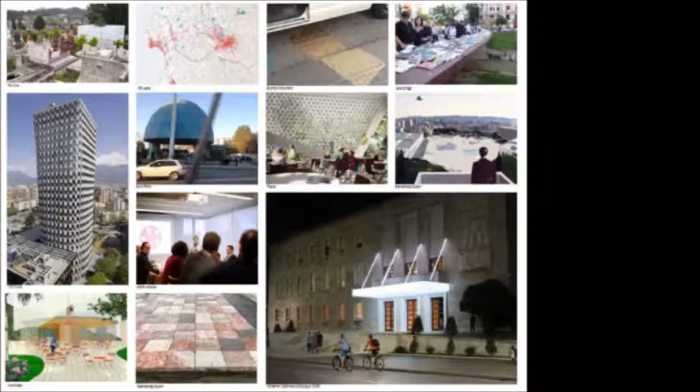The projects of the timeline are very diverse. It almost feels like a sample of all the moments in life. We have made a grave, a gas station, a bridge, this tower, and we are also currently producing the central square. So in that sense, Tirana has proven to become a very fertile context for us.

And in retrospect, we think that is not a coincidence, because we were very much looking for a place that was open, ready to think of new opportunities. To be honest, that is sometimes very difficult in Belgium, in Flanders, or in the center of Europe. As a young architect, you have a lot of desires to do things, and you are often confronted with a situation where people block you more than use you.

I think a big problem of contemporary society in Europe is there's a lot of resistance to change. What we found in Albania was a huge openness to change, to invent, to try out, to at least do something. And I think this page is already proof of that quality.

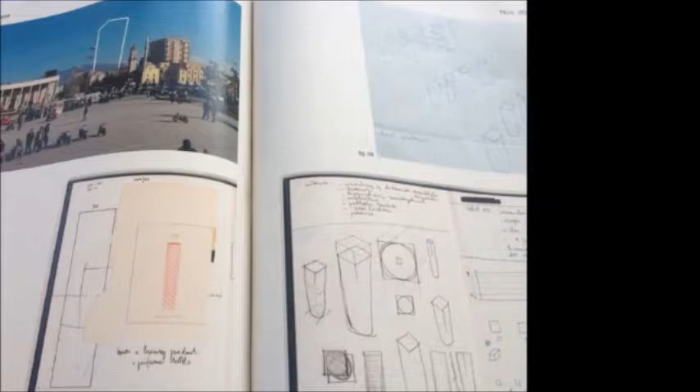Our proposal was to capture this light with a tower that would be a shape that goes from a round footprint to a square top, where you see that this produces a building which answers the somehow impossibly fine silhouette which was drawn in the master plan, and somehow did a pragmatic proposal to that desire, shifting in a way the elegance to how light and shadow falls onto that shape.

A second reason I think why we won the competition was that we proposed basically a quarter of a cupola on top of one of the monuments of the city. So basically finding a relation to something that was there and that was largely overlooked - we somehow cared for it.

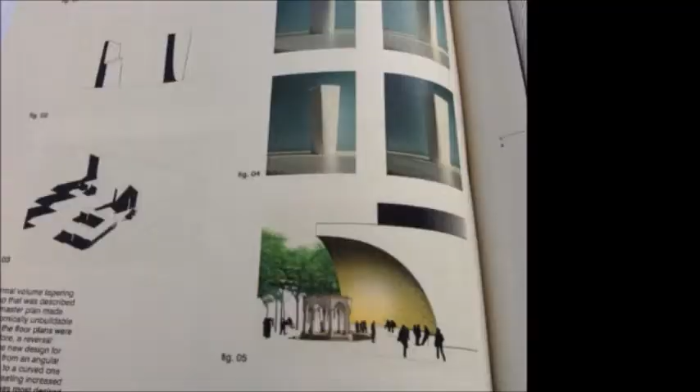And the third reason was that we were able to present the project orally. So we didn't have to show panels only, but we could also share what we thought, what we felt, how we would deal with those observations, and how we thought the building could become intelligent. But we were also able to say that during the competition we were not able to reach that intelligence yet. So we explained how we thought the project should become a kind of laboratory, a work in progress, something that would be shared with the people around the table.

And that, I think, is a very unique condition that we do not often find in European tendering - that you are able to express intentions, you are able to express doubts, and you are able to share somehow how you would set up a dialogue, rather than just convince someone of how smart you are and how well your result is. So I think to be able to relieve that fake impression of knowing it all was actually an opportunity that we could seize, and that made us, I think, win.

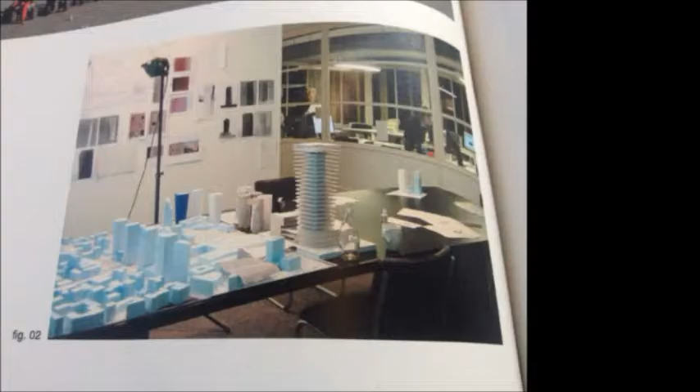Of course, we had tested some possibilities. Here is the possibility of a mineral facade, which is a condition to capture that light, this condition of light and shadow. The day after we won, we were sitting together with the developer, and he was saying that he accepted the choice of the jury, but he didn't accept this solution. So very early on, it became clear that it would become, in a way, very difficult. We were also confronted for the first time with his very physical and very emotional way of expressing himself.

So we embarked on this journey. Here you see 2005, on how to take these intentions, to try and give solutions to these intentions, but also reshape these solutions according to the local opportunities and the local capacities that we would find.

Being there as a young international office by default put us very quickly into a situation where we were meeting a lot of other people and where we could set up a series of test projects.

This was one of them: the question to build a gas station at the entrance to the city center. We proposed quite an iconic gas station with a cupola that we wanted to make in brick, as a way to test the combination of a cheap material with readily available labor in the country.

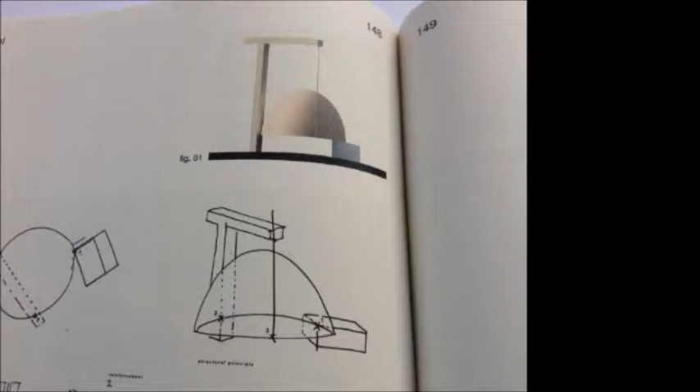So the idea was to use this gas station to become a prime example of what we wanted to do with the tower.

This encounter was extremely enriching, because he, for instance, is someone who had studied but took up the endeavor of opening a gas station because that was the most lucrative. We also met, for instance, a gynecologist who made pizza, because in that country that kind of business produces much more value.

So we were confronted, one-to-one, with a lot of absurdities, and these absurdities were actually very interesting to start to understand how that society works and how things are interpreted and perceived.

The goal of producing that brick dome proved impossible. We tried to set up certain alliances, for instance with a technical school from Belgium that had this technique of making a dome, but still he didn't want to try it.

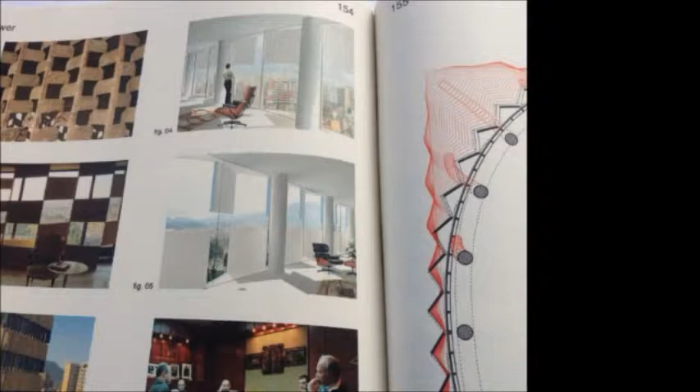And this also made it possible for the glass facade to just run from floor to ceiling in a very simple way, making the best thing possible.

So this produces this type of plan with a core which is also earthquake proof, and then with a series of simple floors, and with columns which incline in subtle ways. So a building that requires a certain sense of precision but doesn't depend solely on that precision.

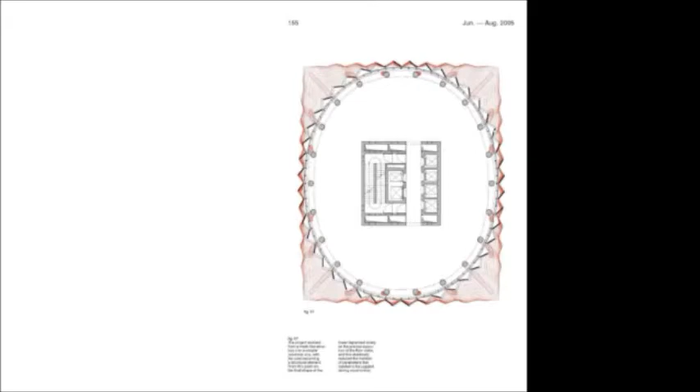And the panel basically produces very beautiful proximity, and also has basically the size of a body. So also the windows that are left out are somehow very human scale, very man-sized or woman-sized, which gives suddenly not only this very abstract skin, very abstract building, but also a very personal experience when you are in the building.

And so, funnily enough, with the building having to become so dumb, and with the program also changing so many times, because the developer had a lot of difficulties setting up the right program. So it started out as a mixed-use building. It gradually became, at a certain point, a headquarters for a bank. Then there were discussions with an international hotel. They didn't work.

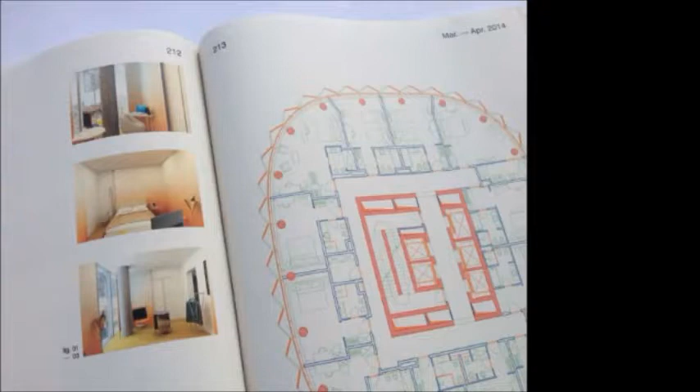And this was also very much the case. So here you see, for instance, a plan drawn for a hotel room, trying to fit it in. But also plans that were produced - this one, for instance, a proposal that we did to him of not making a hotel, but making more very compact apartments for international people to come and live there.

Because this is the only building in Tirana, maybe by now one of the few, that has fire safety according to regulations, which has a double fire escape stair, for instance, which a lot of other buildings don't have. So suddenly we thought you could think of different types of use that go beyond the hotel.

And the funny thing is that all of these changes, for him, it's very imaginable. So he doesn't have a fixed program, he just has a building, he builds at capacity. And still today, even if the hotel is in use, some of the floors are left empty, and he will see what he will do with them. So it's a very organic way of dealing with a building of that size.

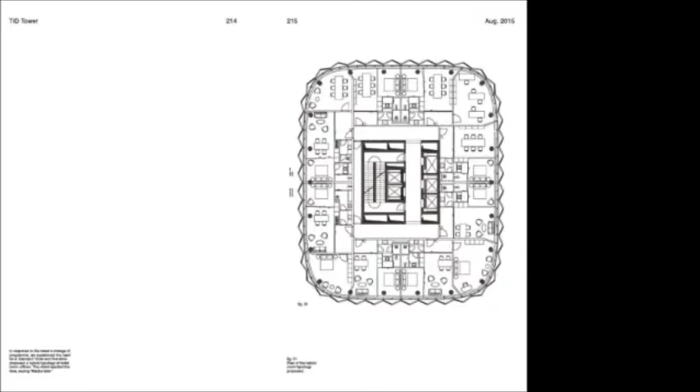So this plan is drawn 10 years after the first plans.

The building was also, let's say, manipulated quite brutally during the construction process. So, for instance, when he decided to make his own hotel, he had to have a congress venue, which he decided to make underground. He started to demolish the floor of the street that was in between the two buildings of the complex - that's where the floor was connecting.

And when he was confronted with that situation, he decided indeed that he would not demolish the structure, which was a heavy discussion with his engineer. We, at the same time, came up with a proposal to put that venue on top of the 3-story building, which is now turned into a 4-story building.

And we proposed it as a continuation of the facade with a glazed pavilion in the middle of that, which produces, in a way, a very beautiful outdoor patio.

Yeah, it sounds maybe very like a caricature, which maybe it is also a bit, but still I think it was very interesting to think of building systems and think of reactions that would take his question and not say no, because it was not the plan, but to say yes, but in such and such a way. And so to improvise basically with these changing conditions and to invent, to be, let's say, radically flexible, you could say.

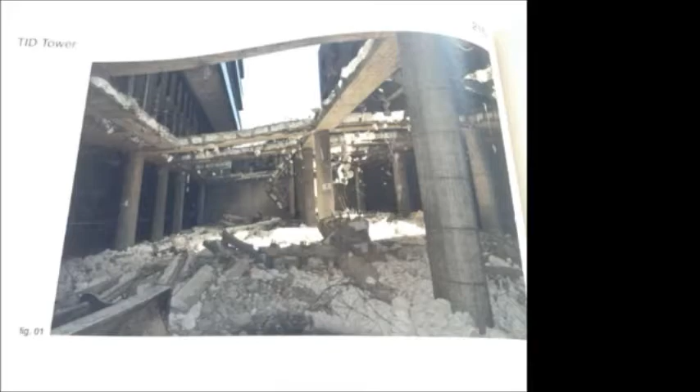So this is a zoom of that demolition, and this is a zoom of the Congress space proposal, which you see here in plan.

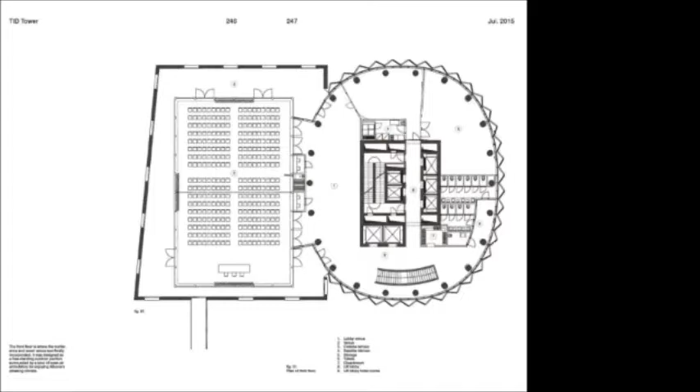And interestingly enough, I think a certain formal logic about the building, like this shape that goes from a super ellipse to a rectangle, were in that process anchor points giving rules to the building. Even if they are very artificial, they would always allow us to reason within a certain system.

And so this adaptive reuse produced a building which in 2015 was both figuring in the In-Flight magazine, while at the same time was being transformed and demolished, which is in a way something that happens with buildings anyhow. For instance, this building is an example — today it is being transformed and still we're using it. But for us it was a very interesting exercise to be confronted with it.

So to think of buildings basically already from the perspective of their inertia to change, but also their capacity for change, and how you would combine these both things — this resistance and this openness — in an interesting and flexible way.

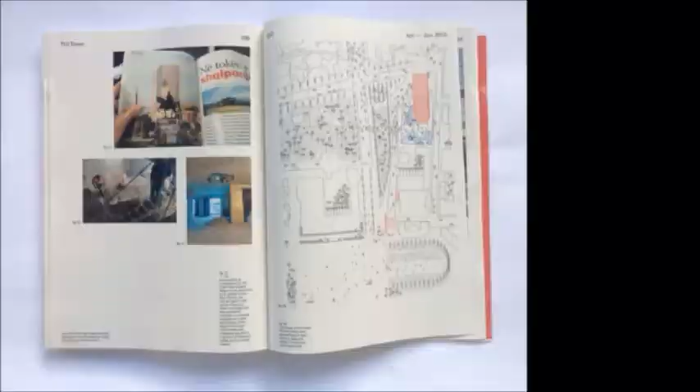So that's one thing that we learned by doing that building. But another thing that we learned very much in Albania was to activate the value hidden in the process of architecture. So what I explained about the building being open to change, I think this is something we all share and try to look for and maybe value. Another thing I think we all do, and maybe if you talk about good architecture in general, is to activate the value hidden in the process.

But we actually think there's very little discourse about it, that people don't talk about it that much, and that clients and cities are much more confronted with architects trying to sell the genius of their solution, but not very much the value they can have during a process. And the moment that you can work together with someone, that's actually a very valuable moment.

And that's, I think, a second thing that we learned very much and that we try to promote as much as possible — to see architecture very much as a process and to try and activate the value that is hidden in that process.

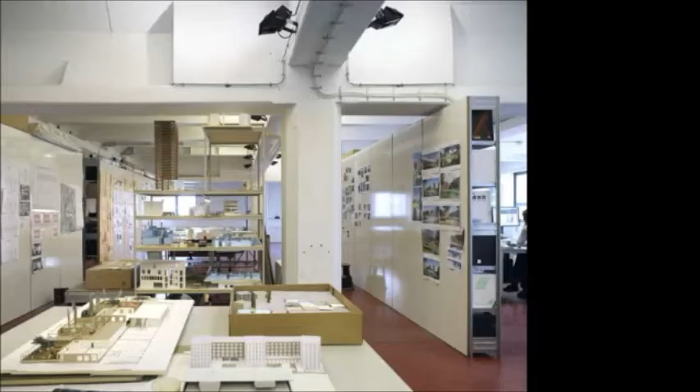So what does this mean in a very practical way? It basically means that you are in a situation where you discuss with people, not around the table agreeing or disagreeing, but really working together with all of the tools that you have as an architect — models, images, plans — and that you are actually sitting in front of people that you want to make something with.

And that's actually a very valuable situation, that you are suddenly able to transform the dialogue, not into an oppositional dialogue, but a way where you find third solutions in discussing. If you have one person saying one thing and another person saying another thing, during the working together you can find other things.

And so that's something that we have throughout the years tried to refocus more and more — we try to do the modeling like an architect does, but try to open up that process of modeling. And also, the fact that a lot of things are digital and extremely fast and easy somehow, means that by reducing it, making it more efficient and more quick, you can increase the time for dialogue and really value the moments of sitting together, working together much more.

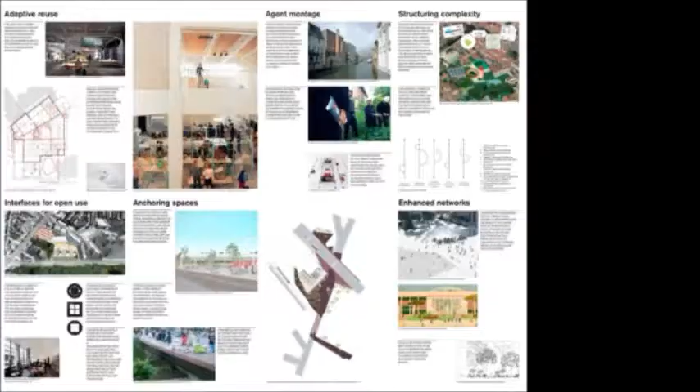In order to make that story accessible and understandable to ourselves and to others, we have started to make small leaflets, which we call conversation booklets, which try to put into words what these different processes are. So if we talk about urban renewal, we talk about a process that is about adaptive reuse, but also about agent montage, about structuring complexity, about interfaces for open use and making anchoring spaces, and also about enhancing networks. So the second and last part of the lecture will be about trying to explain this, so that maybe we can later have an exchange or a discussion about it.

What do we mean with agent montage? Just like in Tirana, we were more and more confronted with the situation that in the existing built environment in European cities, programs are not clear. So you have existing buildings, and writing down a program often doesn't work. So how do you deal with that situation? And also, if you write a program together with other people, how can you come up with a situation that somehow empowers these people to also become creative and to become actors in that process? Not just to hand them something ready-made, but to somehow think along and produce an openness in how the building could be used.

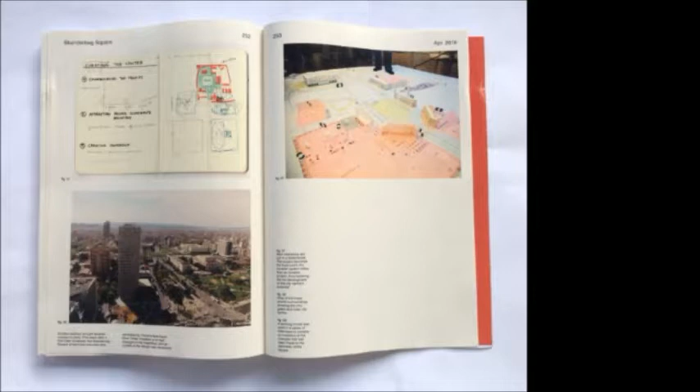It started with a mapping of what had changed. So this is the mayor on his socks on a big model, showing the difference between the situation in 2011 and the situation in 2016.

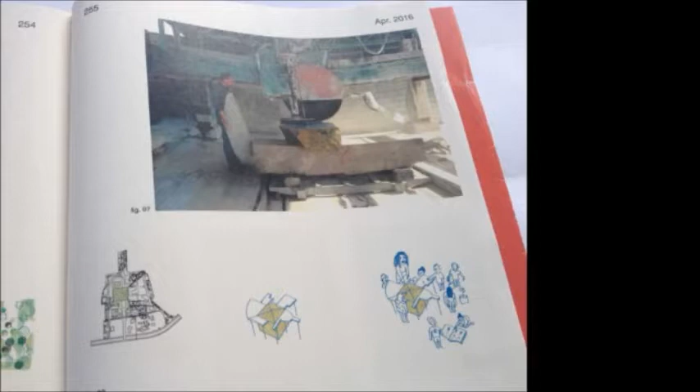But then also, basically, we made a model of our project, which was the project in its most simple form, and then set up a series of situations, dialogue settings around the project, trying to trigger people to invent it in different ways and from different perspectives. So during a period of, I think, 3-4 months, we both had a very intense work with all the technical people again in Tirana, but also a very explicitly open process where we were sharing the fact that the project was to a large extent undefined, maybe to a large extent didn't produce the right choices.

For instance, the project was very mineral and maybe not very green. And so we were somehow collecting and sharing these thoughts, which was in a way a thing that never happened in Tirana before. It produced ideas about reorganizing the ring road around the project, but also very simple and basic ideas like making a book garden where the National Library is, somehow to produce links between the project and its surroundings in a very simple and organic way.

This kind of process of offering the project as a very basic frame, and then allowing a program to be invented from that frame, was also something we tested and experimented with in Belgium, for the Buda Factory, a project for the refurbishment of an existing building that the city had bought, wanting it to have a cultural function.

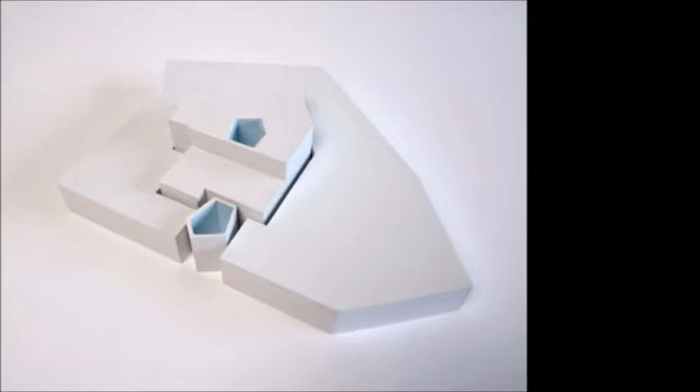They didn't really know what that cultural function would be or what would work. So alongside the definition of the program, we produced a building that would still offer a sense of clarity, even though a lot of the building's definition could not be made, because simply they didn't have a very clear view on what they wanted.

So how did we react to that situation? We made a proposal where the center of the building had an atrium, a clear void, whose shape we found by taking away a few of the beams. Then we repeated that found form as a pavilion in front of the building.

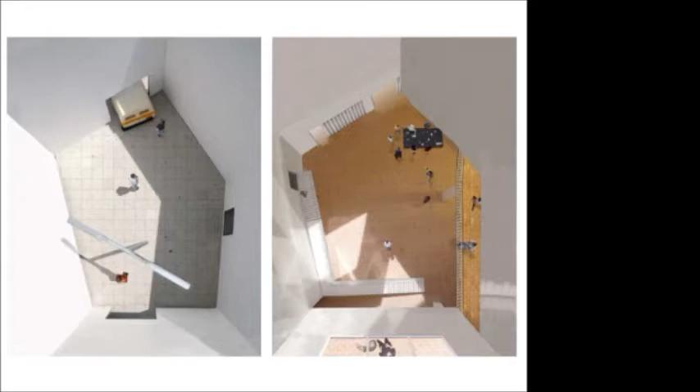These two interventions absorbed most of the budget we had, producing somehow, out of a factory building, a public building through these two spaces: one, an entrance pavilion, and another, a space that organizes the circulation.

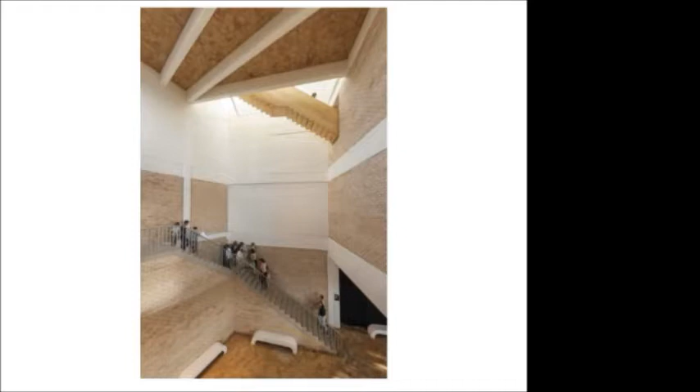We tried to manipulate all of the choices to be as pragmatic as possible, but also to reveal the beauty of the building. So here the floor is existing, the ceiling is existing, but the brick is new, producing a new whole.

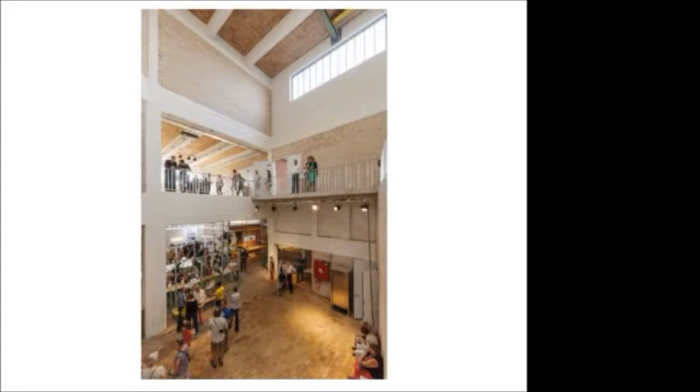Together with the client, we invented a series of actions that allowed them to program the building gradually. One thing that happened is that not all spaces were treated and brought to standard in the same way. Some spaces were left without insulation, some even without heating, with the idea that their occupation of the building would change during the seasons.

They had very little to start with, and we came to the conclusion together that at the entrance there would not be a reception, but an atelier, a kind of fab lab in its most brute form, and that the person running this fab lab would also be the receptionist, managing the whole building. So the program collapsed into one core, and with that one presence they could flexibly swell or inflate the occupation of the building.

This meant the building would have a daily life where only maybe 20% is used. Then when there's an exhibition, the Fab Lab can produce it, and the exhibition can open up a few rooms. This goes to the point where, for some events during weekends, up to 80,000 people passed through the building in one weekend.

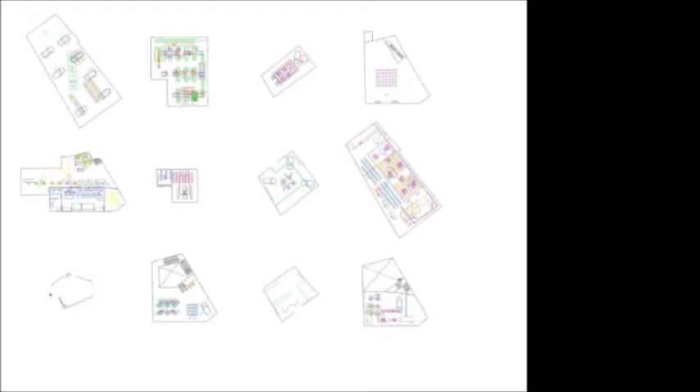So the building, in all its simplicity, allowed them to gradually build the program. Now the Fab Lab has enough users that it can be moved away from the entrance upstairs. The building, together with organizing that process, manages to really grow a program rather than write and roll it out.

So here you see this kind of post-occupancy situation as it was produced. I think that's valuable to think about regarding organic growth: the things that are stable in that building are these two spaces, these two centers, while the things that are extremely flexible are the perimeter, the facade.

For instance, now they are building an elderly home next to it, of which we are not the architects, but the discussion is about sharing that garden and opening up this facade. This is actually the entrance to the parking garage of that building, but it becomes an extension on the upper floors. This space is shared with the creche, the daycare center.

So I think that's a valuable lesson: to organize buildings almost more as urban fabric and less as objects or containers.

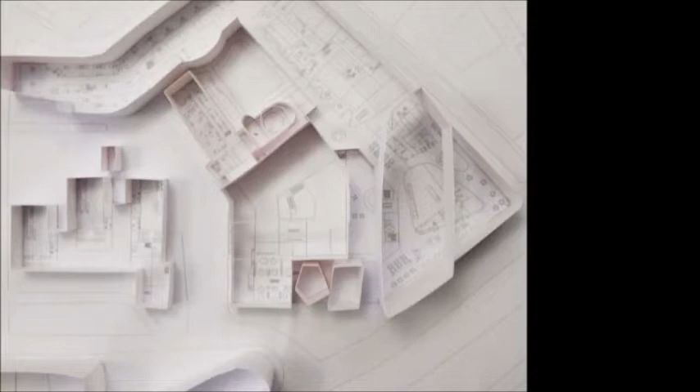Of course, all of this is extremely fuzzy terrain. We step into a lot of situations and conditions where we do not really know how to handle it, where maybe the only power that we have is that we acknowledge that we don't know.

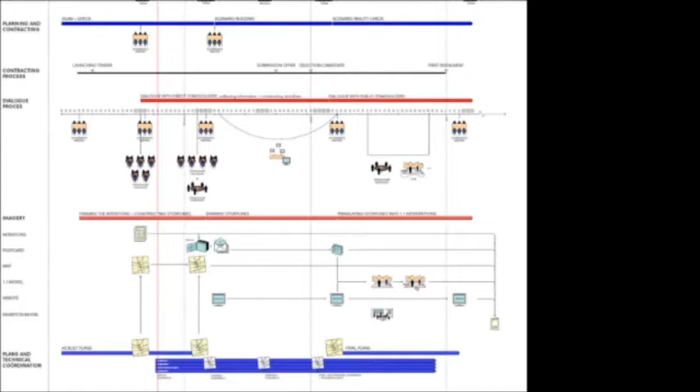But a thing that we have started doing as well is to structure that complexity in its different objectives or different purposes, where both the dialogue process and the more architectural processes are aligned to each other, and we check how the one can feed the other. And this happens with very simple tools.

For instance, for Skanderbeg Square, we have produced a process booklet, which contains a set of references and a set of intentions that come from very different sides, where we also take the responsibility to visualize and somehow capture references that come from other people. And we produce that kind of common imagination that, because of its simplicity, this A5 format, can start to structure in extremely simple, straightforward ways.

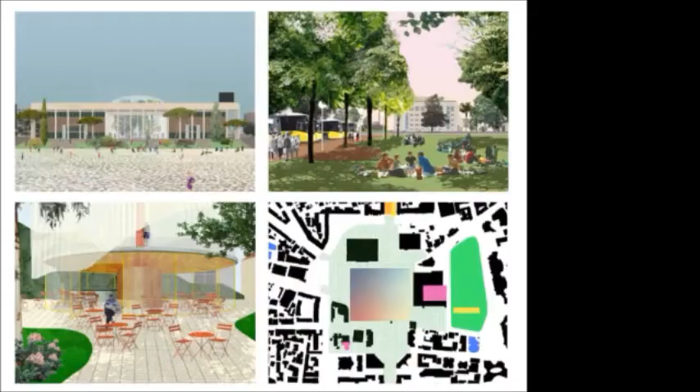And this simplicity is actually also very engaging for people. In Tirana, this has led to the Skanderbeg Square actually activating a lot of even private initiative around it.

In Saint-Nazaire, where we have won a competition in this submarine base, to make in one of the parking garages for submarines a festivity hall, we have used the process of drawing what the context is as a way to define what the strategic impact of this simple program could be. So the City of Saint-Nazaire has since 20 years gradually invested in cultural program in that building, and the program that we were building was adding up to it.

It's a building which is extremely beautiful, but also very difficult. And so they are trying to turn this into a public destination, without a lot of budget, but incrementally doing things.

And so every decision that you take ideally has strategic value and produces a kind of master plan, rather than that you first have a master plan that you then roll out and check. Simple decisions like where do you put the entrance, where is the logistics, produce something that has value beyond the building alone, but also produces public space, puts into attention some values.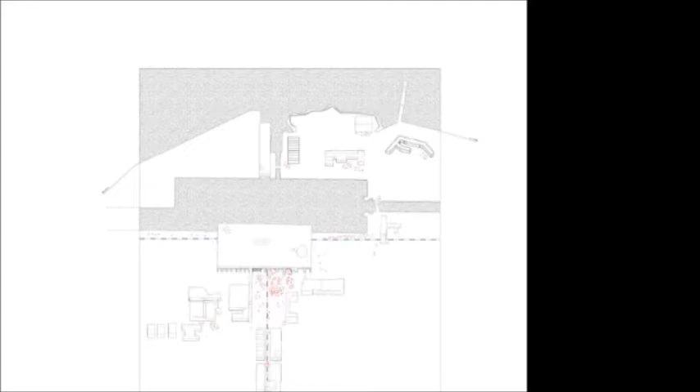We started to make it more precise, to highlight the elements that are important. For instance, this basin turned out to be very important. And so gradually we understood all of the things that were happening that were not documented in some way, but that we could link to and react to.

And so the drawing becomes a drawing of absorbing information, but also giving it back, allowing it to be put in the middle of the table, and to immediately pick up on a discussion, seeing that complexity represented.

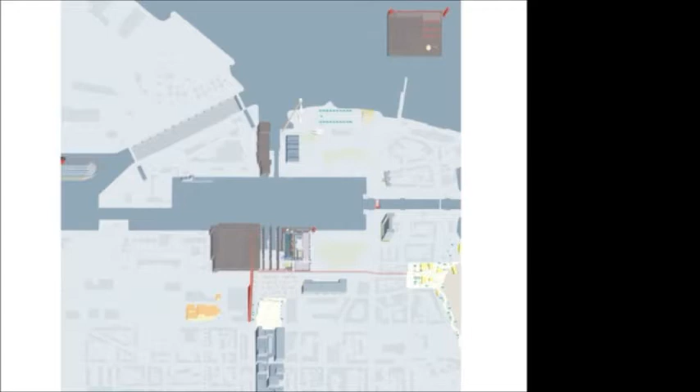And so here you see how some of the choices were made - I will not go into the detail of it, but I think you get the idea. Being able to zoom in also suddenly makes some choices, like where do you put the entrance, extremely valuable. So it's not treated as a minor question, but it's every time checked in its strategic impact.

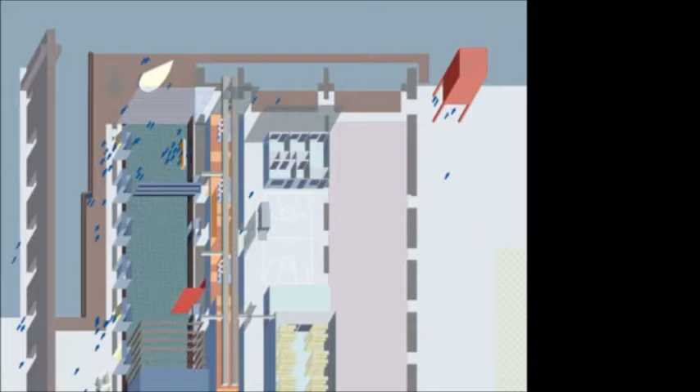And that's how we came up with the proposal of a mobile ticketing office, which could both activate the building but also the public space. Something that was accepted at that point, but now that we are constructing the building, it is again being questioned.

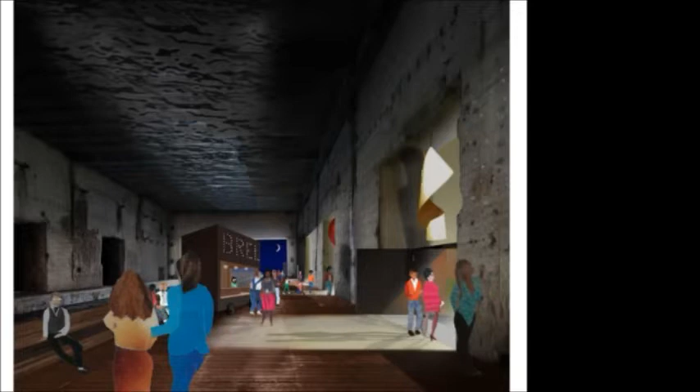This kind of scenario thinking, thinking of buildings as infrastructure and program as scenarios, is something you can really open up. So we make very simple models, and what happens is a bit like when you play as a child, you have this prop to allow yourself to imagine. This is a capacity that, if you offer the right tools, almost any client can do, but simply doesn't get the tools to do that.

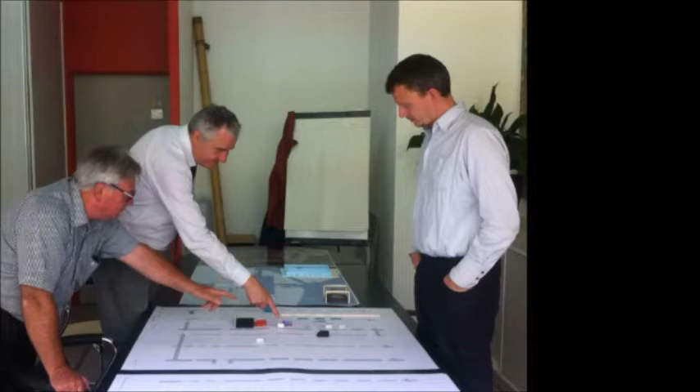And actually this type of game, or this kind of very basic, simple model, is a really interesting tool to activate a client and put them not only in a critical mode, but also in a productive mode, where you suddenly start to get a project thought from different perspectives, but with the same formats and the same tools.

I think it has become clear from the projects I've shown that more and more we shift away from looking at architecture as an object, and shift attention to what kind of spaces anchor a project. We don't take the boundary of a project for granted, but look for things that can structure buildings. So anchoring spaces in that approach is very important.

One example in the TID building is this quarter of a dome, which surprisingly, even by the private developer, was never questioned. He never proposed to make an entrance in that facade, although it's somehow the best facade, you could say. So there is an interest in finding the things that are acknowledged and recognized by everyone.

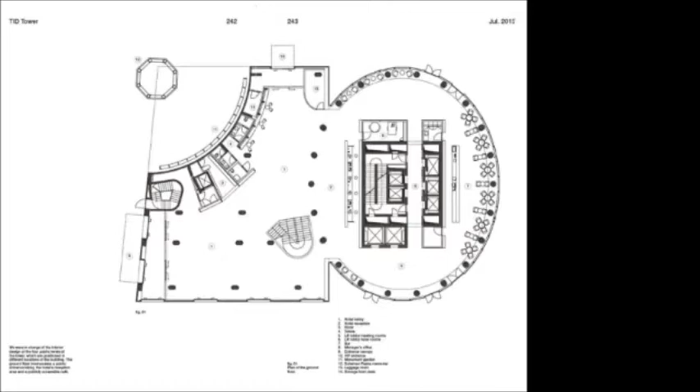Somehow the shape of the building, of the tower, and the shape of that dome were the anchor points of that building, and the large part of the space in between changed and was manipulated a lot. You can also see the lack of order in this plan as the result of that kind of negotiation. So structuring spaces that are negotiable and spaces that are unnegotiable is a very important aspect in opening up the discussion.

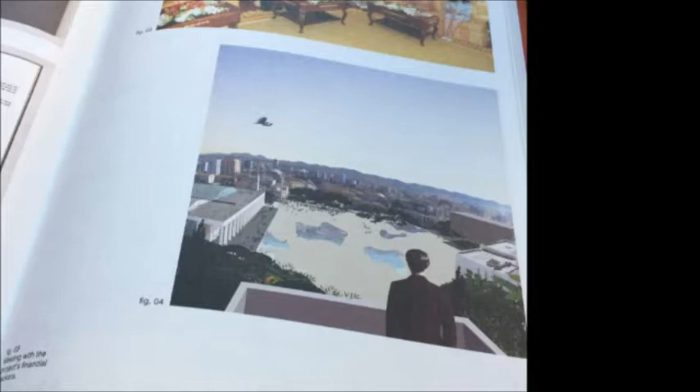Jumping back to the Skanderbeg Square, with this abundance of space, we made this distinction by proposing the project as a very clear square, an actual square, with a series of gardens around it. So the square is somehow the collective decision, the decision that we are the guarantee of. The gardens become more of a thing that can evolve, and within a very simple framework, can offer a lot of diversity and difference.

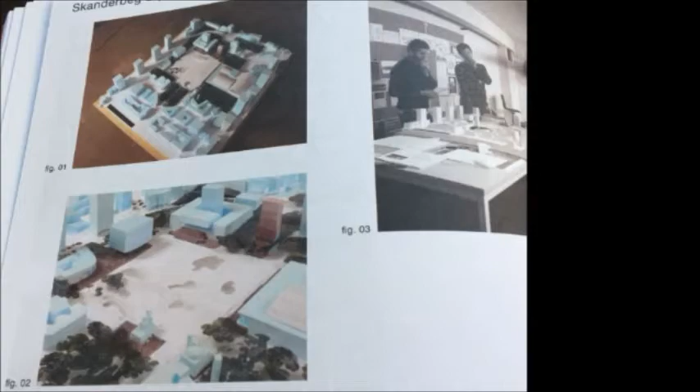So here you see the view of the square seen from the gardens. The definition of that anchor space of the square is actually very simple: it is a very flat pyramid. It slopes up 4%, meaning that if you stand in the middle, you are about 2.7 meters higher than at the edge. So suddenly the shape becomes very dynamic, even though it's just a square.

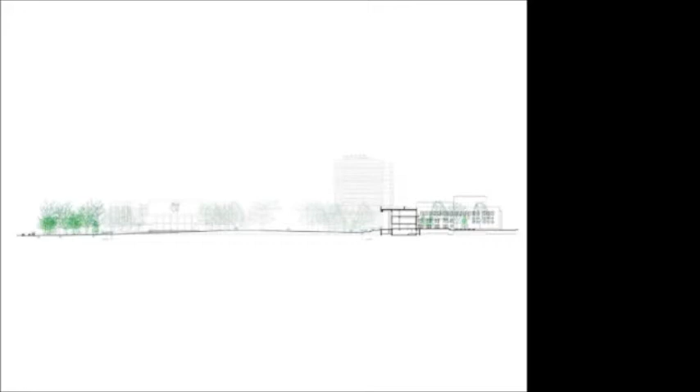If you stand in the middle of that square, you are suddenly on top, in the center, and it's a really specific space. Something it does is that the middle of the square ends up at equal height as the monumental stairs of the building surrounding it, so that without touching the stairs, we completely change their impact.

Something it also does is that we proposed a series of water points on the square, with water flowing, not fountains but more water that flows in four directions, allowing a kind of dry path on the diagonals. This water produces, on that very rigid monumental square, situations of randomness and frivolity, you could say.

Today the square is being executed, and we found a way to do it informed both by the fact that we didn't want this square to be just one thing, and also by the fact that we had to produce this in a very limited amount of time, so we had to source a lot of materials at once.

This made us produce a link to one of the things we found during the process of developing the tower, which is the huge variety of resources in Albania, a lot of different stones. This led us to propose that the square become almost like a national mosaic, made of very different types of natural stone, mixed and matched to produce different color fields, so that walking on the square gives a completely different scale.

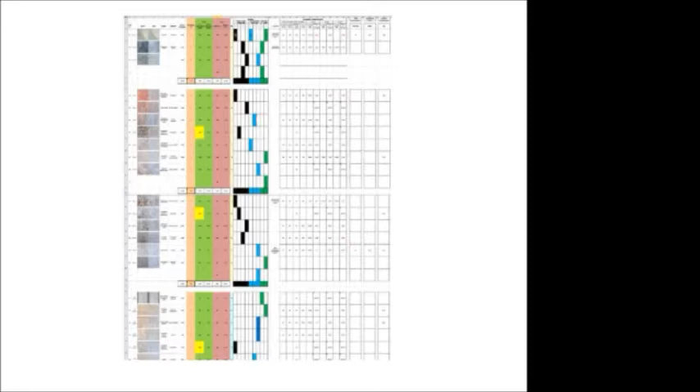And so this has also become part of the Skanderbeg Square, to source these stones, managing their availability together with the design we produced, basically producing a square which, if you look at it from far, is sawn in a rough way so that it actually looks rather white, because of the dust as well. But then once you put water on it with these fountains, you temporarily polish the surface.

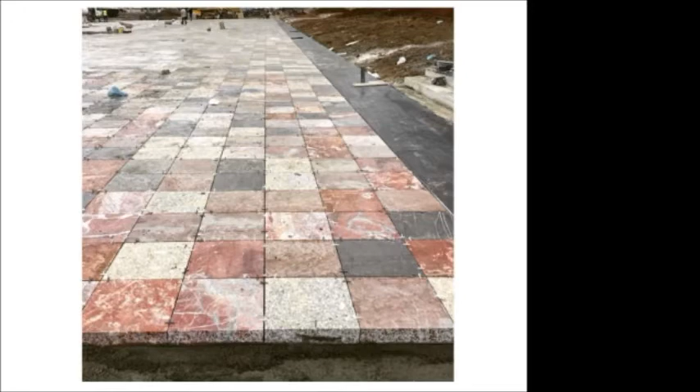And the roughness becomes smooth and transparent, producing an effect like this, where you almost, with the water, reveal a sudden richness and complexity of the veins of the stones. So it produces a square where you feel the module but also see the field.

And this field, indeed—this is a construction site situation. There's also a bit of cement on it now, but basically in its dry state it would be very white, but in its wet state it would reveal all of these differences. And differences which also produce suddenly a very different way of perceiving it.

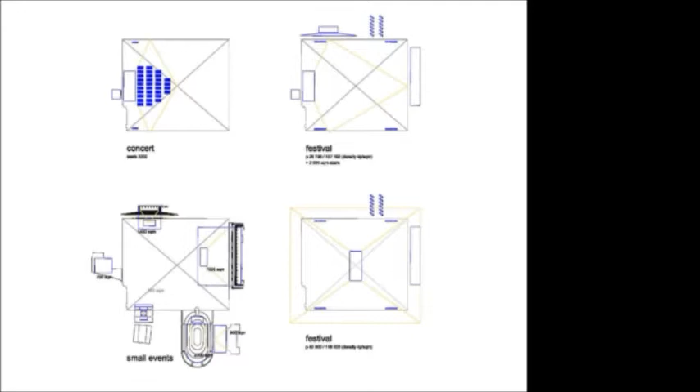So this is a refurbishment of a house in Flanders, in which we have proposed the extension of the room to become like an undefined, overscaled space—a space without a program, a space that feels both inside and outside.

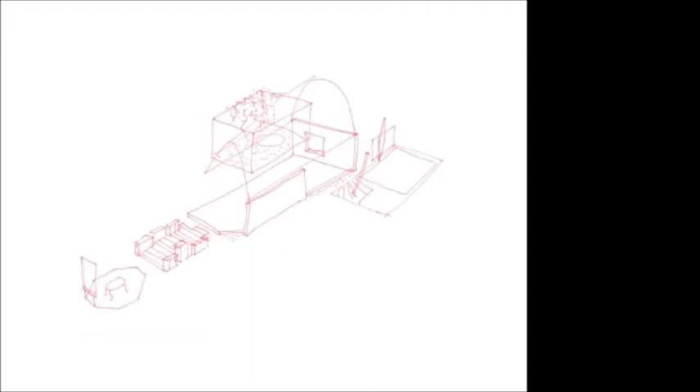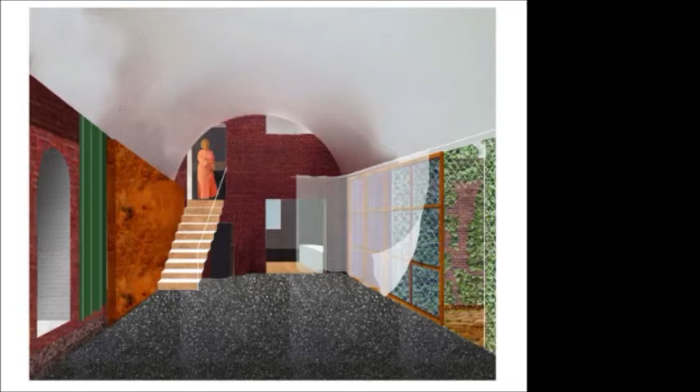And a space also defined just by a floor and a roof. And a space that, in a house, not only tries to think about the functions like cooking or living, but also to think about the moments in life which are really valuable, like having parties or inviting a lot of people, or being alone in a certain sense of emptiness.

And I'm sorry—as you can probably tell, I have a bit of a cold. I also noticed that I'm rather slow today, so I don't know if I should speed up, or if it's okay. Okay.

And so this is a view of that house, both a view on the central space and one of the annex spaces next to it.

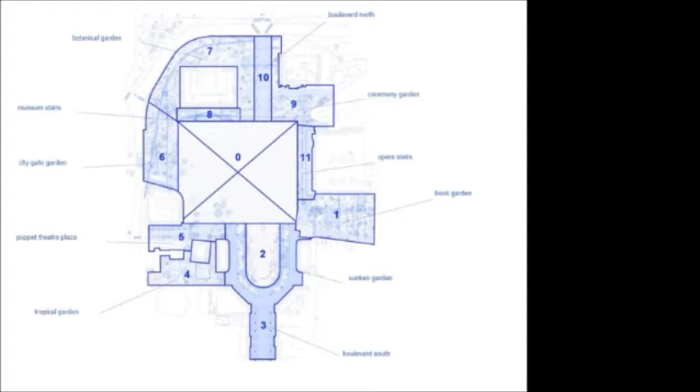This idea of the anchor space is complemented with a focus on what we try to call interfaces for open use. And the square is an example of that. So you have the zero space, which is the anchor space, but then a series of gardens around it, which are designed to somehow become a very thick border and to become a space where a lot of small encounters, small exchanges can happen.

So, for instance, redesigning the stairs that lead to the National Museum to become both an entrance to the National Museum, but also integrated in a series of paths which circle around the square and different ways of sitting.

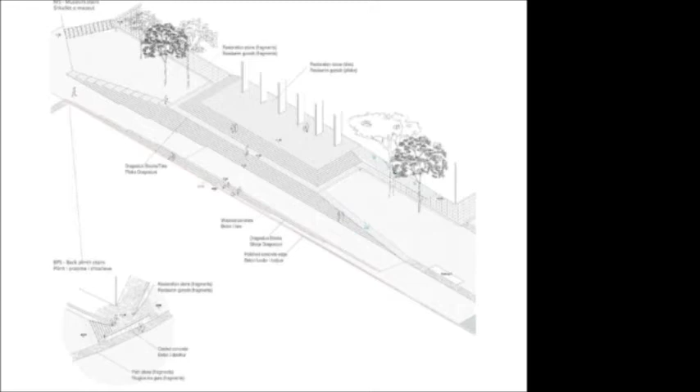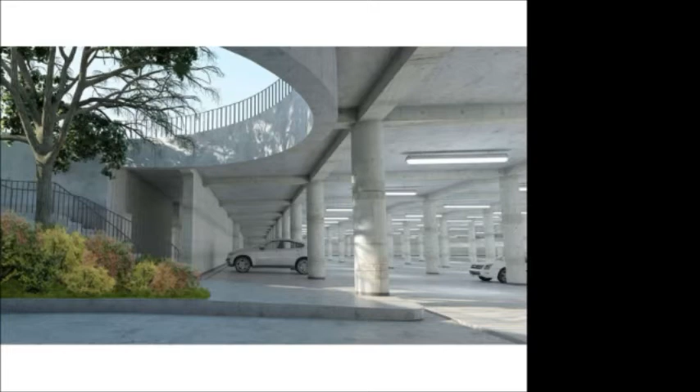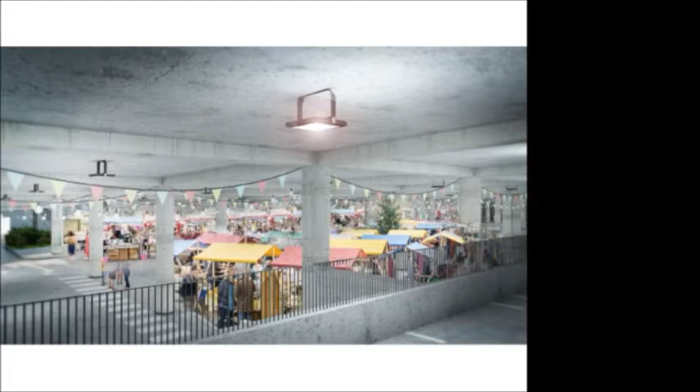And the same goes for the parking which is under the square, which is a program that was added recently. And this entrance is like one of the gardens sinking down, but also then producing a parking which is too high to just park cars, but which then can allow a certain margin for other things to be organized.

And especially in a city like Tirana—but I think this is also basically the quality of any European city—that is different scaling, and this inadaptation, this unadapted city, if you could call it, that's actually a lot of the value. There's a lot of margin, there's a lot of leeway to start to invent and imagine other things to happen.

This is one of the really sustainable qualities of European cities specifically, and this is also what produces this kind of soft proximities. So this is a view from the lobby of the 5-star hotel at this passage space towards the office building that houses a call center.

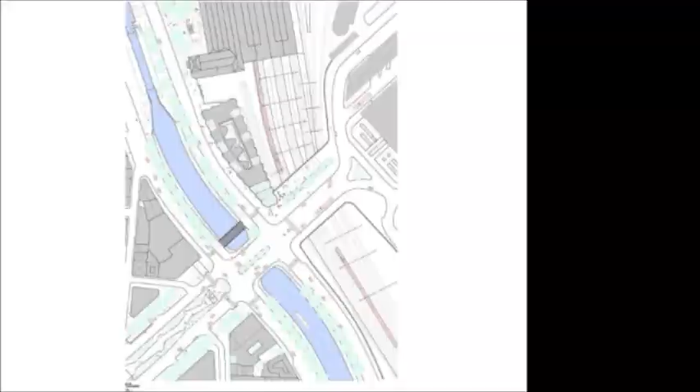It's also, so the question here is how to produce that. Not with buildings, but with green. I will skip this part just to not to—we can maybe come back to it later.

So if I jump to this idea of how one action can become part of a network that you produce, I would like to explain it with Skanderbeg Gardens, which, as I said before, is maybe the most fuzzy part of the project, but which I think will become somehow the future image of it.

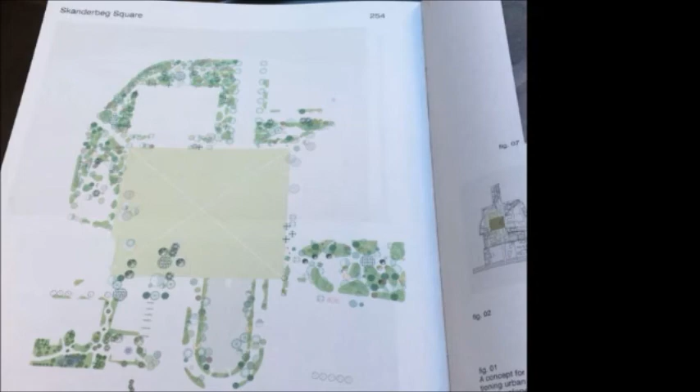And also the future quality, a quality which could make of Tirana a very inviting Mediterranean city. So what we started to do with these gardens is to discuss their components very specifically with the biologist, so that we can start to imagine it as both a representation but also an embodiment of the qualities of that Mediterranean environment.

So here you see again the openness of the space, and here the kind of space which is basically a grass field with trees on top of it. What we would like to produce is more the idea of a kind of urban jungle, a place where you could get lost in.

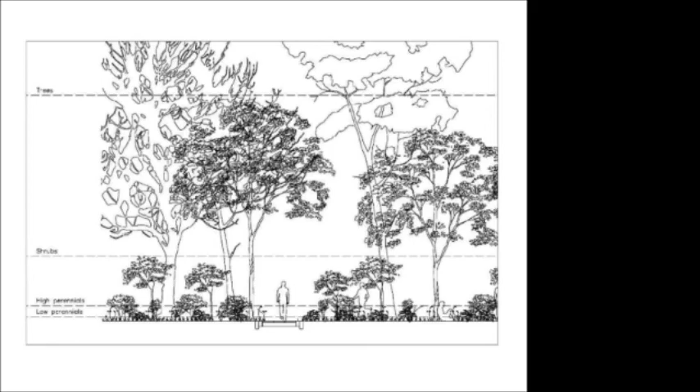It's also made out of different layers, and that can, in that sense, become both more resilient, because it's somehow a system that strengthens itself, that is less weak in the summer, for instance, but also can produce a very different type of experience.

So this is a very quick collage of what these type of pockets could be. Really to have a scented city center with smell, and also to produce this kind of sublayer which has a completely different scale than the scale of the center.

What is interesting about it is that this project is, I think, one of the biggest tree plantations of Europe in these days. So we plant thousands of trees and even more shrubs around the square, and we have done so by choosing very specific species, which are species that you find in Albania.

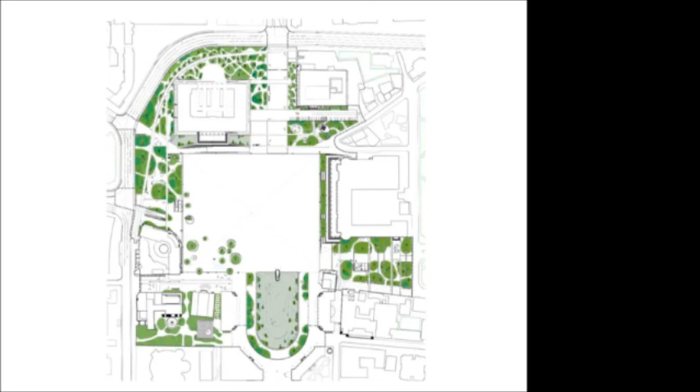We have also started to set up nurseries together with the biologist and the contractor, not only for this project, because the time span is too short, but also for future projects, so that this square could somehow start to grow outwards, and start to become a model that you could develop along this central spine.

That would relate very specifically to the three ecosystems that you find in Albania, so that visiting the square would also become a kind of encounter with the diversity that you find in the territory, in the country that surrounds it. And in that sense, it becomes a model of how you could, through actions and through becoming very specific about how you do things, start to reshape and recraft this environment that I have shown you before.

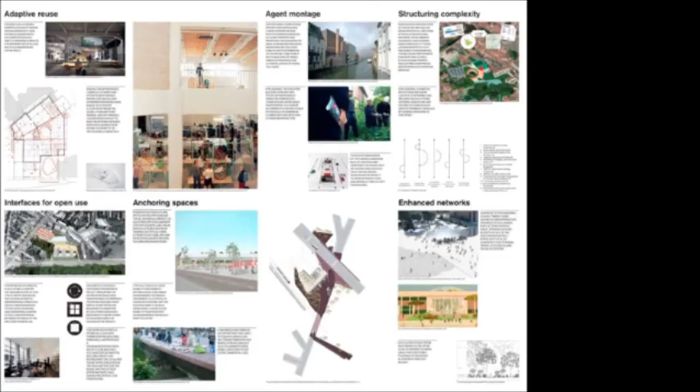So these six topics as a way to round up, a way how we try to, as I said in the beginning, think of architecture as a transformation process, how we try to add different dimensions to it, and how we try to deal with the complexity. A lot of these stories are to be found in this book, as I was saying.